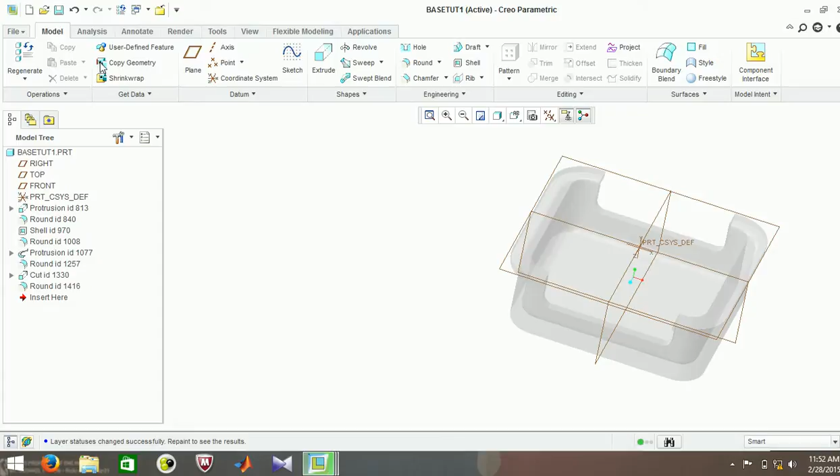Okay, so today we are going to learn how to make use of mechanism to create a simple piston mechanism. So first of all, I've already made the parts. I'm just going to show you the assembly. The parts you can make using simple extrude. So you'll get an idea of it once you see the parts.

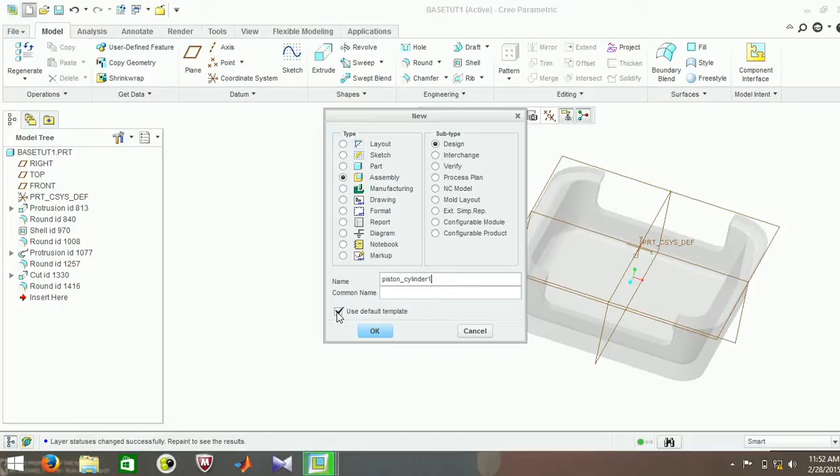So I'll give it any name, say, piston cylinder. Piston cylinder. Okay, I've given it a name and I'm not using the default template. I'm using the MMNS ASM design. Okay, so first of all, let me click on assemble. And here is a list of parts that we are going to use.

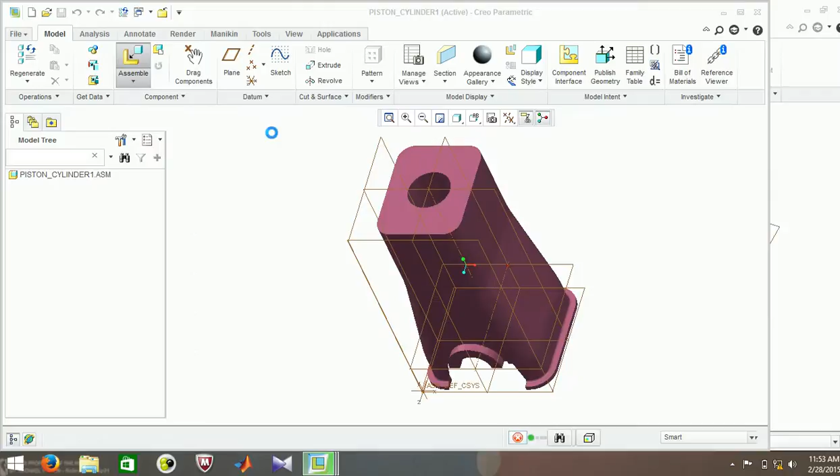So first of all, let's start off with the block. I'm going to open this. So this is the initial setup that you're going to place. So make sure that you make it default. That's it. That's all you have to do, and press on OK. So this has been made default.

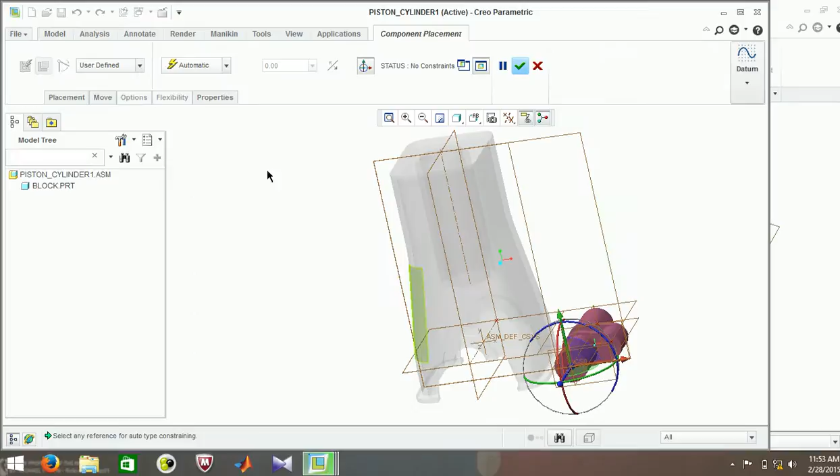Now we'll again click on assemble and start assembling the second part. So we'll go with the crankshaft. So I just click on crankshaft and hit the open button. So once you open this crankshaft, you have to make sure that before trying to assemble it with this base, you need to give one of these that are used in mechanisms.

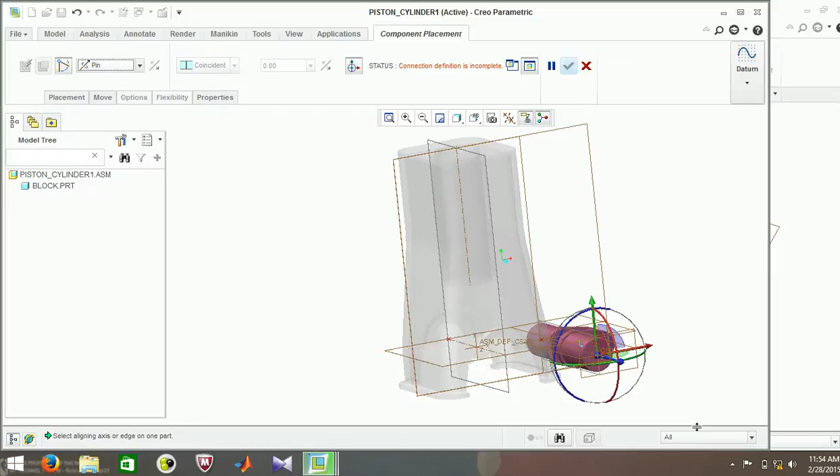So first of all, the crankshaft is going to rotate. So you have to click on this pin because it is a pin joint. Okay, so you hit this pin. So you need to give two constraints for this pin. So first of all, let me give the constraint of the center line. The center line of this must always be aligned with the center line of this base. So I'm going to go ahead, and there it is. By default, it has given me a coincident, which I want.

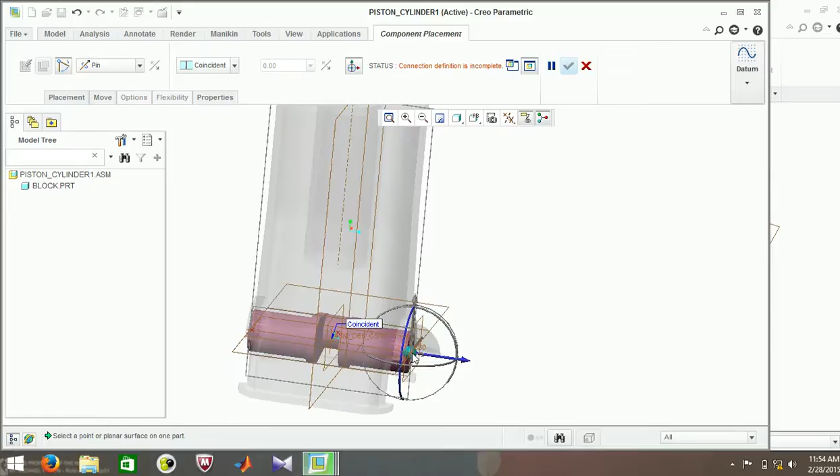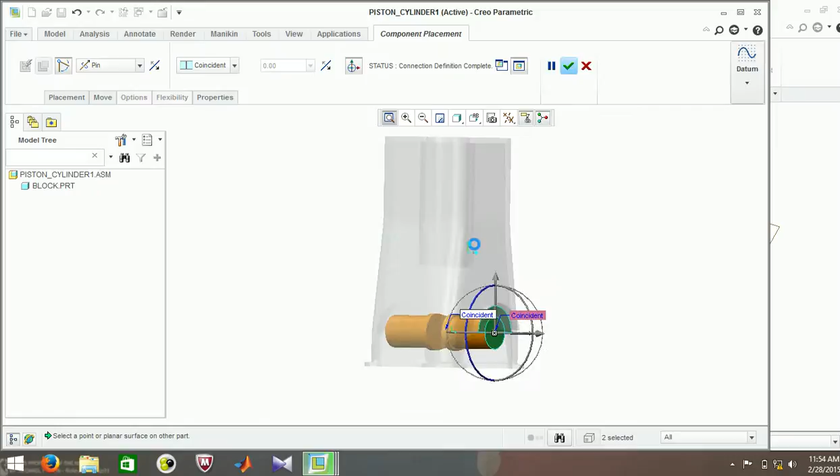Now what I need to do is, you can still see that it can move like this, which we don't want. So the next constraint which I'm going to give is this surface and this surface. So there it is. Here you can see clearly that the connection definition is complete. So this is how you make a pin joint. Now I go ahead and click on OK. So this is the first assembly that you have done.

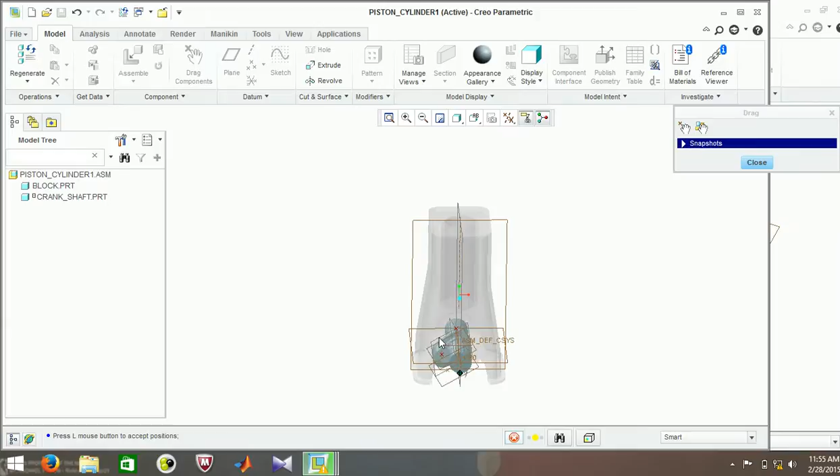Now to check whether you have assembled the pin joint properly, you can click on drag components and select any edge of this, and you can just see. Okay, so you have made it right, no problem. Click on OK. Okay, so let us assemble the next part, which is the connecting rod.

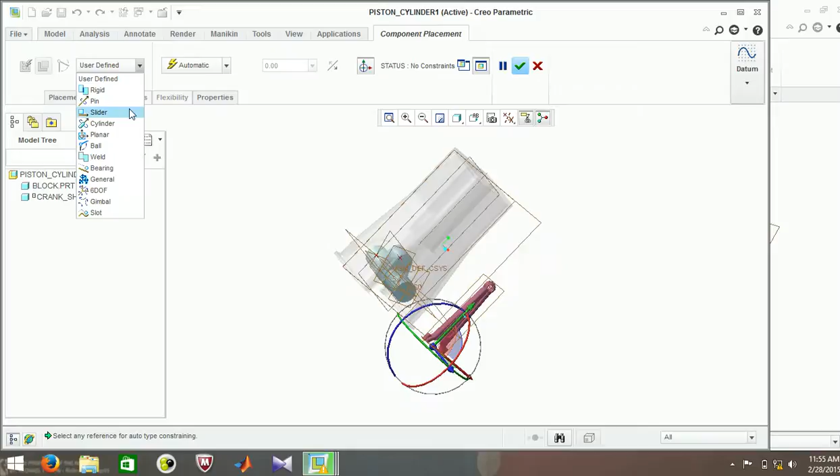I open the connecting rod, and then again we have to make sure to make it a pin because this is also going to rotate. So I'll take the center line of this and align it with the center line of the crankshaft, which is, you can see that this is the center line of the crankshaft. So this is one thing.

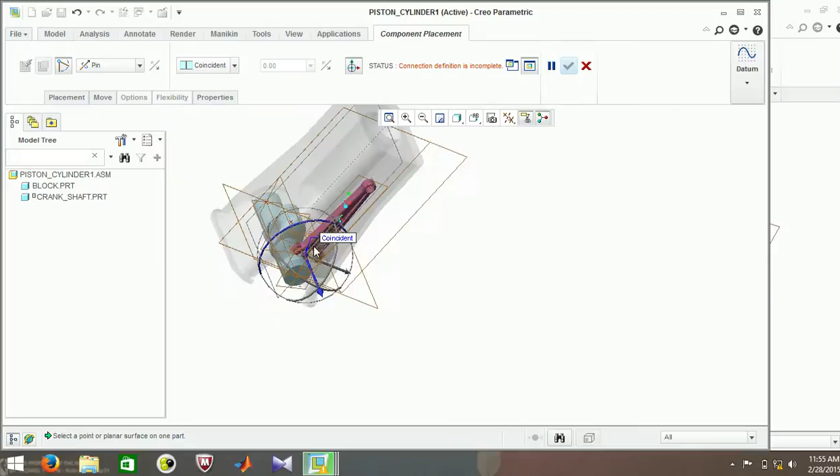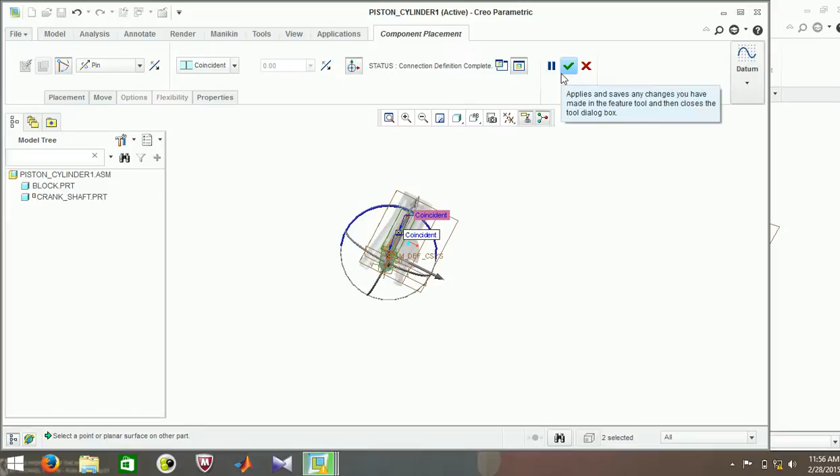And the second constraint which we are going to give, we can give the constraint of plane: the mid plane of this connecting rod and the crankshaft should be coincident. So there again you can see the connection definition is complete. So I'm going to go ahead and hit the OK button. So half the assembly is complete.

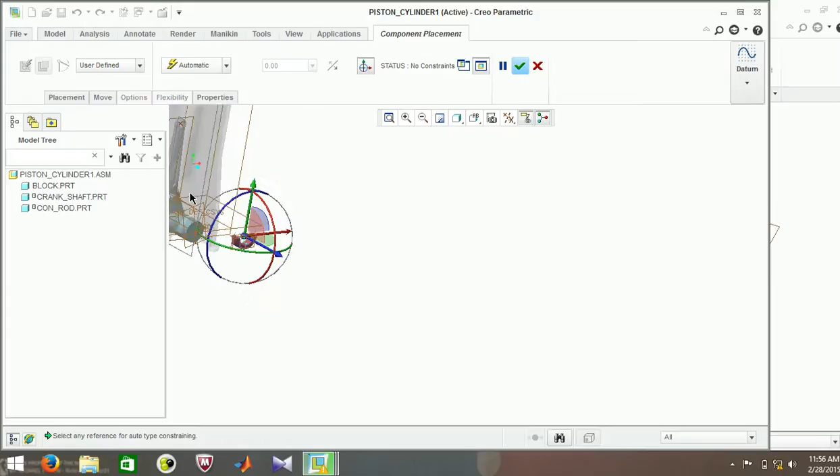Now again I'm going to click on assemble and go for the end cap. Okay, so here there is no need for it to be pin because this is going to be fixed to the connecting rod. So we'll just make it rigid. So the axis of this, make sure that you align it with the axis of the connecting rod.

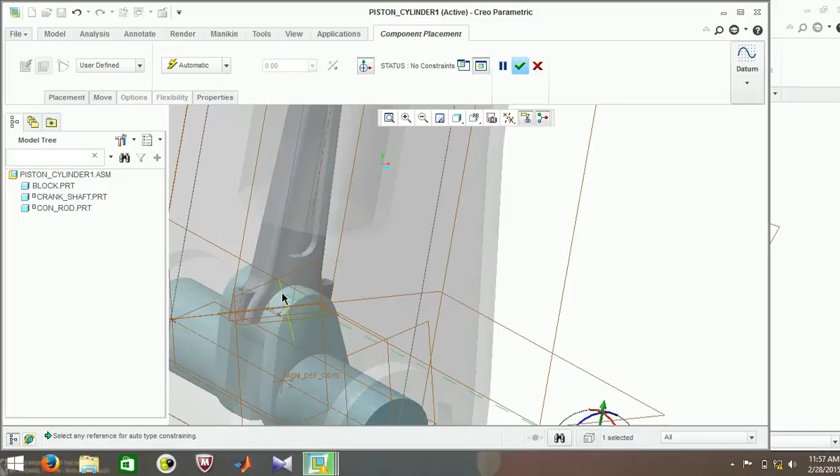So let's just check. This is the axis of the crankshaft. Although the axis of the crankshaft and the connecting rod is the same in this case, we would like to align it with the axis of the connecting rod. So let me find it. It's always better to have it aligned with the axis of the connecting rod. It might take some time to find.

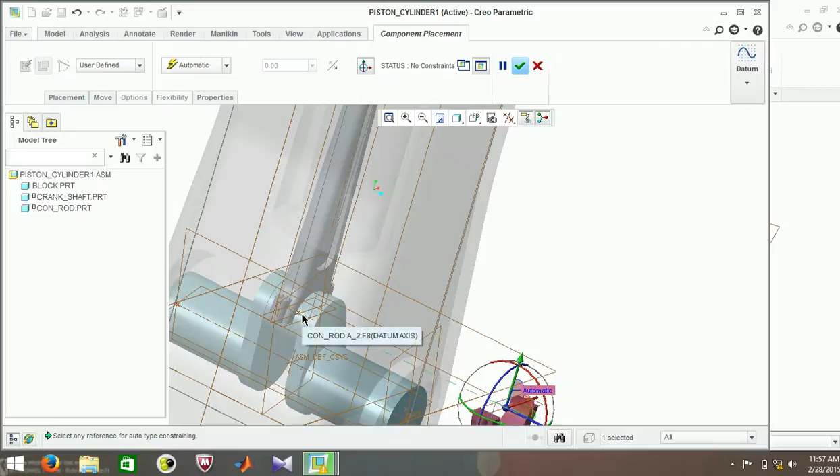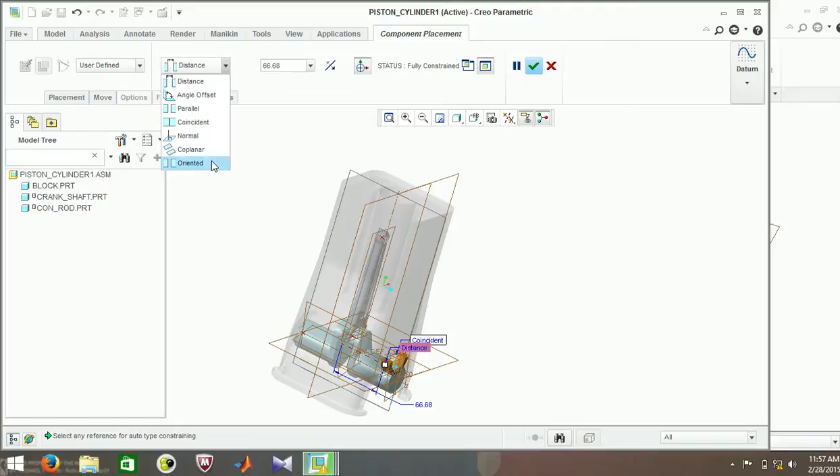Yeah, this is it. So by default it has given me a distance. Let's make it coincident. And the next constraint which I'm going to give is this center line and this center line both must be coincident. So again it has given me distance, so I can make it coincident. Yeah, so there it is, fully constrained.

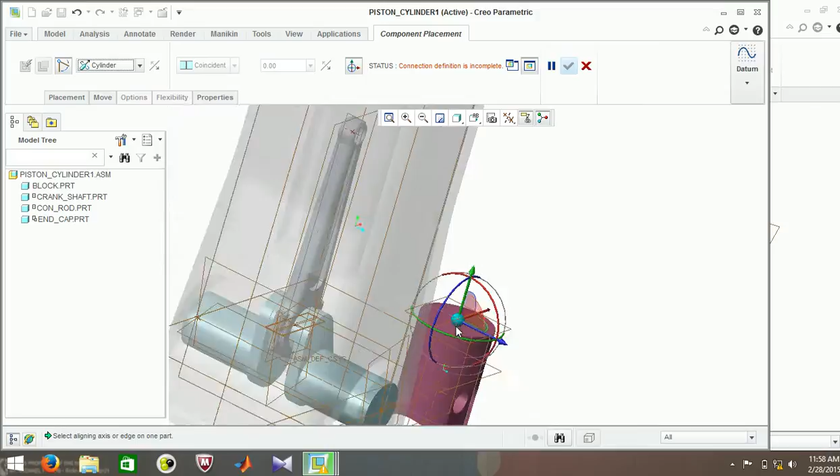You hit OK, and then again you assemble the next component, which is going to be the piston head. So we are going to go ahead and open it. So first of all, the piston head is going to slide along the cylinder, so we'll give that constraint first. For that you need to give the cylinder constraint, the cylinder mechanism. It needs only the center lines of the two cylinders.

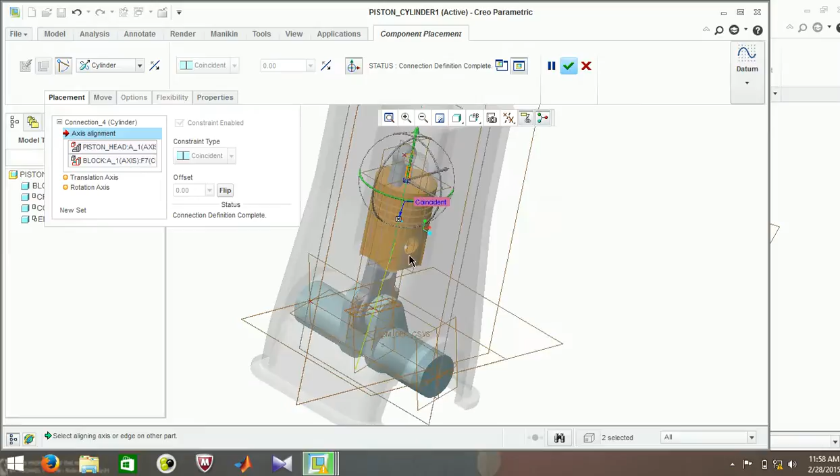Okay, which are going to slide. So this center line and this center line. Okay, so you can see that the connection definition is complete. You can go ahead and drag it for your convenience. Now placement, and you again need to align the center of this connecting rod and the hole over here. So you go ahead and click on the new set, and in the new set you give it a pin.

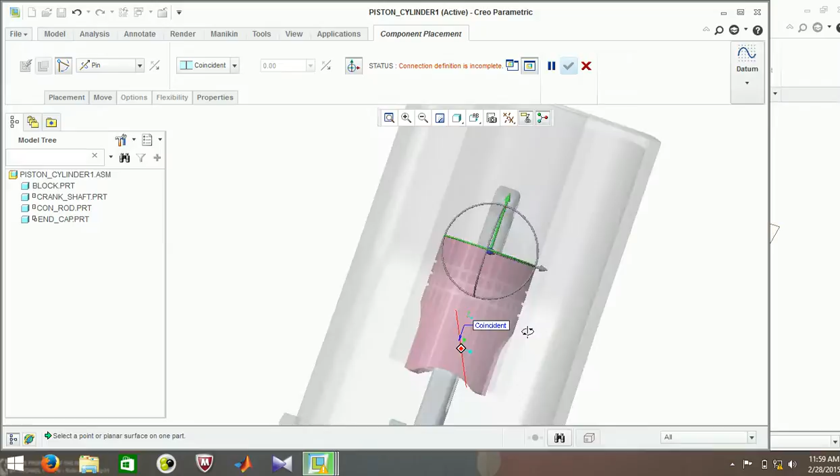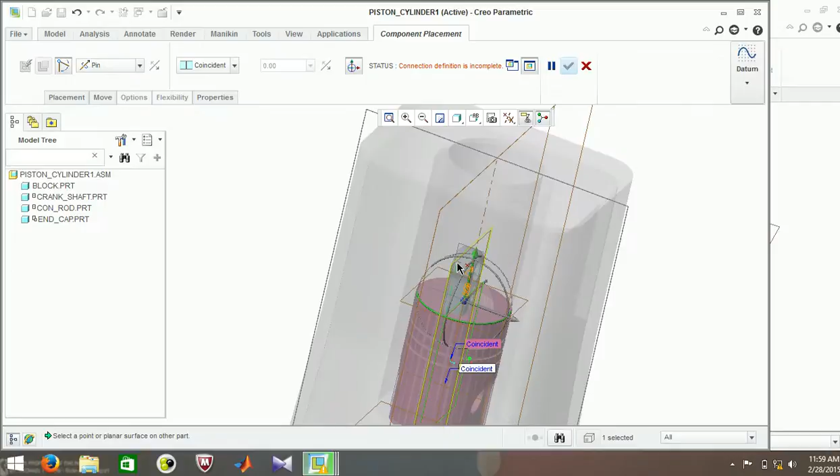Oh sorry, yeah, pin. Okay, so for pin, this center line and the center line of this, they should be coincident. So there it is, they are coincident now. And again we will give a constraint of the planes. The mid plane of this piston and the connecting rod must be aligned. So this and this. So there it is, connection definition is complete.

You go ahead and click on OK. So there you have it. You can just click on drag components and test whether it's working properly or not. So there you have it. This is your simple piston cylinder arrangement.

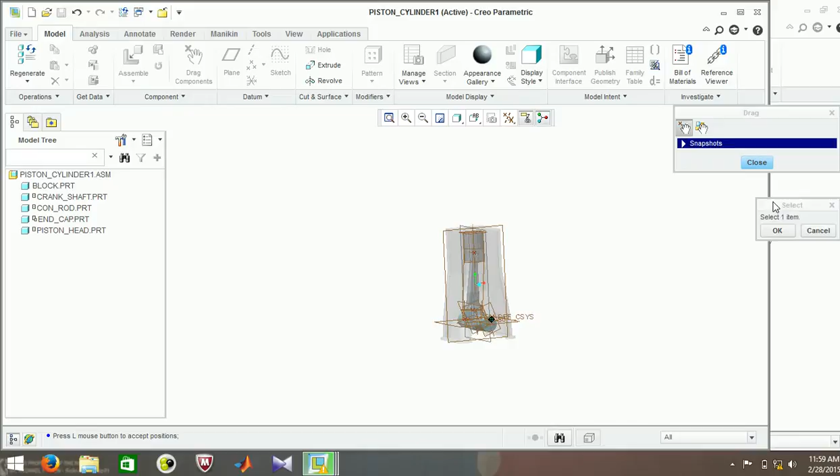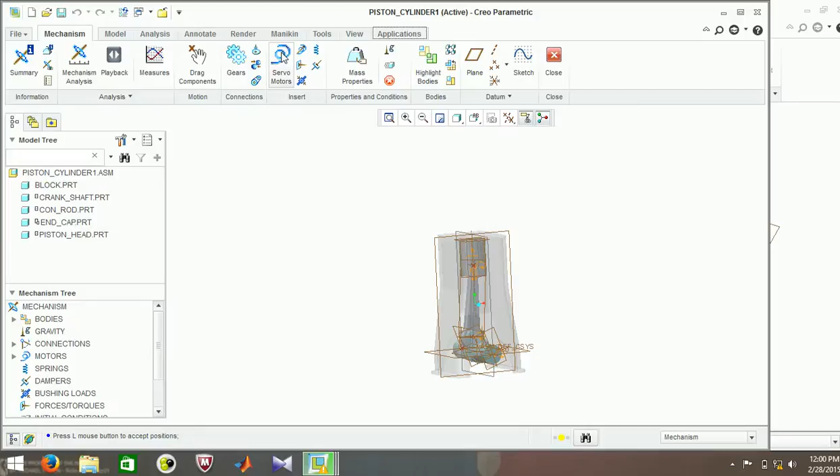Now if we want, we can automatically make this connecting rod rotate. Also you can go ahead and add a base plate over here. That's not a very big deal, but for the time being we won't do that. We'll go to applications, click on mechanism. So first of all, for the connecting rod to rotate, we'll click on servo motors and select this axis.

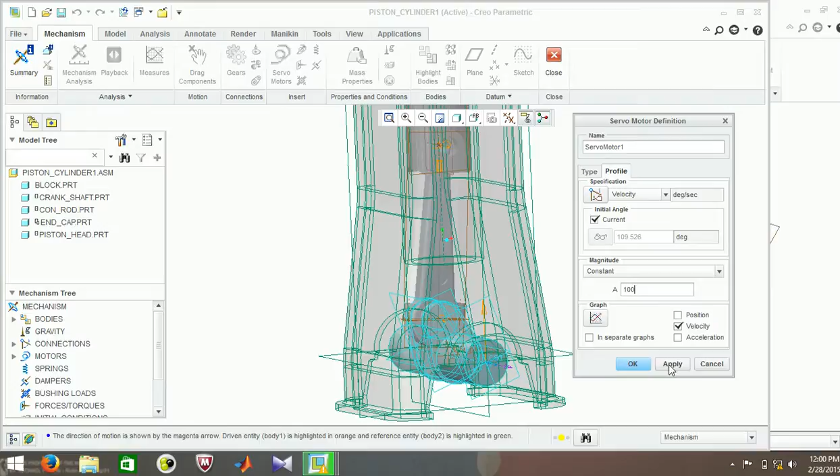Okay, and then we go to profile. After going to profile, you have to click on velocity, so it gives you degrees per second, and you can enter any value, say 100 degrees per second. Click on apply and then OK.

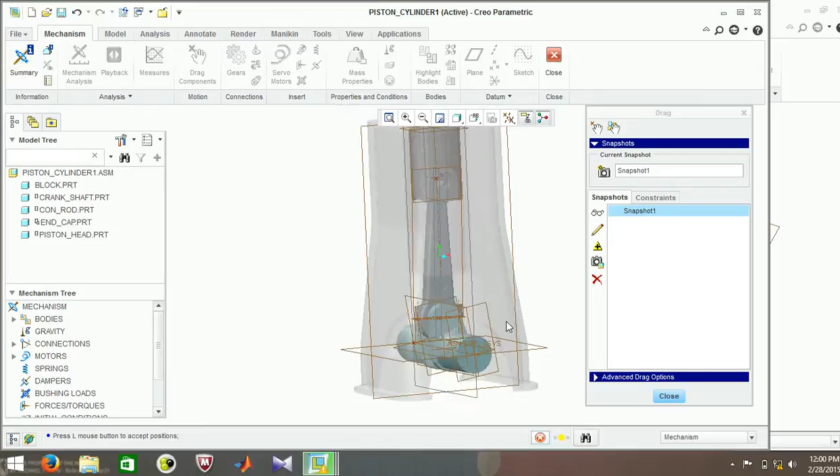Then you take a snapshot of the mechanism. So go ahead and click on the snapshots over here. Once you go over here, just click on this and let it rotate so that it can take a snapshot, and go ahead and click on close. Now we go to the mechanism analysis. First of all change the position to kinematic, and select the snapshot over here, and if you want you can run it.

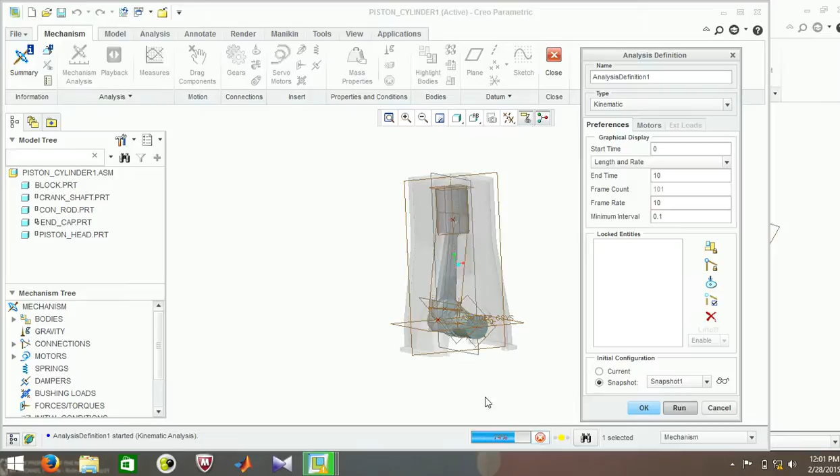So there you have it. This is how you can rotate it automatically. And if you want to save what you have just seen right now, you click over here. You can preview it over here. So here it is, you can increase the speed if you want to.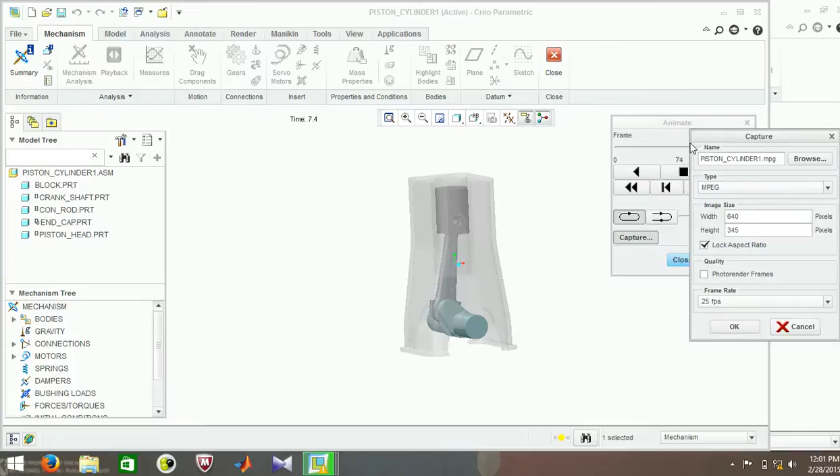Now if you want to record, you click on capture, and after clicking on capture, you just browse where you want to save it. Say I want to save it on the desktop itself, and the name, I'll give anything, vid, and just go ahead and click on OK. And then you can also set the format. Here you can change the image size and quality if you want to, but for the time being I'm just going to click on OK.

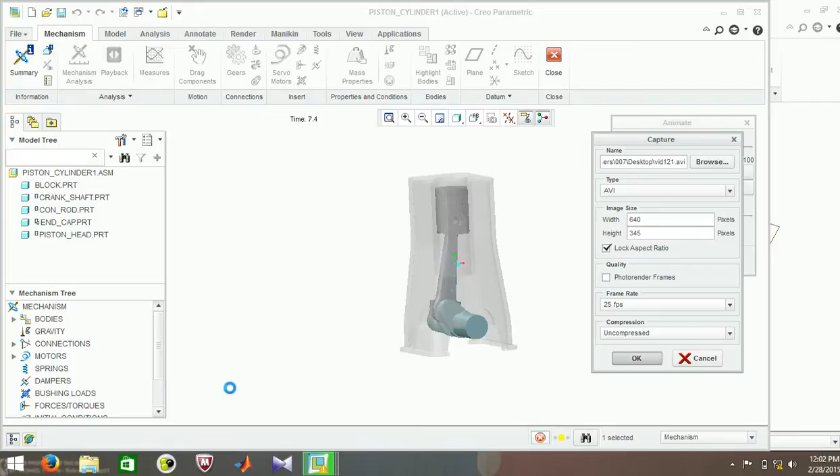So after clicking on OK, you can see that there is this generating frame. When it reaches 100, your video is ready and you can view it in your video player. So there it is. Close. So I'll just show you how you can view the video. Yeah, there you can see it. You can change the quality, of course, if you want to. So for the time being, this is it.